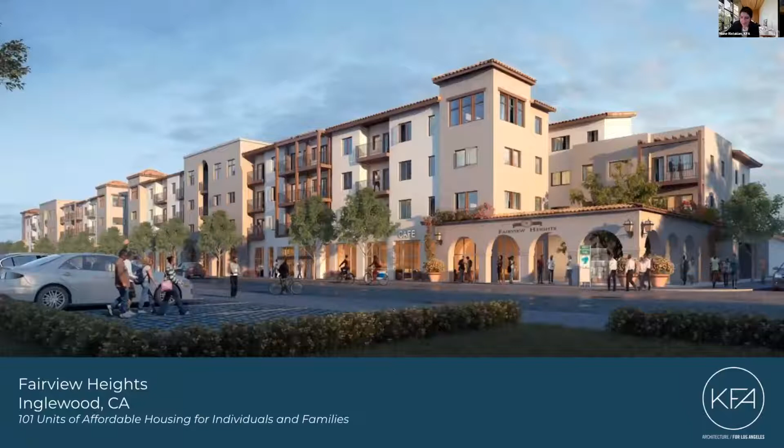The two projects we'll be talking about today have many similarities and have been partially overlapping in schedule. We're going to talk about these projects as they happen sequentially to illustrate how things are evolving in our office and hopefully how other projects can follow suit in the future. Hi, everyone. My name is Mane Ristakian, and I will be introducing the first project, Fairview Heights.

Located in Inglewood, California, Fairview Heights is a 101-unit, 100% affordable housing project with supportive services for low-income and formerly homeless individuals and families. We began work on Fairview Heights in 2018 and recently received certificate of occupancy in January of this year. Nearly all affordable housing projects that receive public funding are encouraged, if not required, to incorporate sustainability measures. For Fairview Heights, both the site and the building itself contributed to meeting these measures.

The site is located across the street from a new stop along the Crenshaw LAX Metro line, a significant transit project in Los Angeles. In collaboration with Metro, this project included an open plaza and public art piece for commuters in the area. For the building itself, we aimed to achieve LEED Gold, and we incorporated a highly efficient heating and cooling system and included all electric appliances in the units.

We also planned to maximize the available roof space for a future solar panel array, though during the design phase, we did not anticipate actually being able to install these panels. We broke ground on Fairview Heights in January of 2020. 8 months into construction, and seeing that there might be some budget available, the client decided to move forward with contracting and installing the solar panel system.

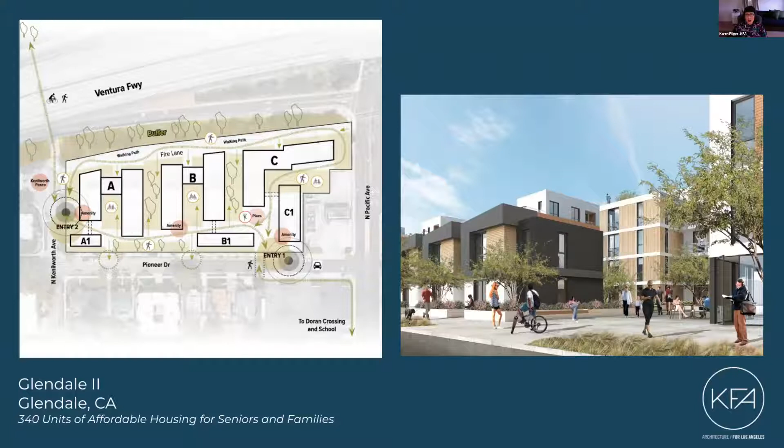With a strong focus on outdoor living, the project in total features approximately 38,000 square feet of common open space, as well as private open space for each unit. The project had ambitious sustainability goals from day one: high efficiency heating and cooling systems, energy efficient appliances, water-wise landscaping and irrigation, as well as water saving fixtures. The massing also allowed for the ability to naturally ventilate the corridors to further reduce heating and cooling loads.

An early space planning decision was to reserve the whole roof to maximize PV and target net zero energy for common areas. All mechanical condensers typically installed on the roof were designed to be located on each unit's balcony. Most notably, the project is all electric.

While it's not unusual to see electric ranges, especially in affordable housing, our projects still typically feature a gas boiler and other gas amenities. In order to plan for this, we located 3 dedicated plumbing rooms on the P1 level, again, saving roof space for solar. Additionally, additional equipment is planned to be wall mounted adjacent to these rooms to most efficiently utilize space.

If you are familiar with green building, you probably know that the golden rule of sustainable design is to determine the goals of your project as early as possible. We saw that with Glendale too, whose goal of going all electric was set from the start. However, sometimes it's okay to break that rule. One of the benefits that we had on these two projects is that in addition to having the same client, we also had the same mechanical, electrical, and plumbing engineers.

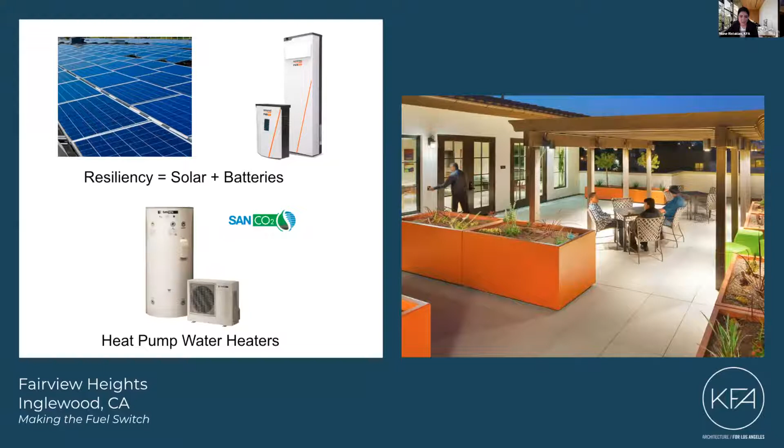Mid-rise multifamily housing is a challenging building type to push the envelope on sustainability. Also, with tight affordable housing budgets, increasing energy efficiency without driving up cost is key. It is great to have clients who understand and champion how planning and implementing sustainability features can fight climate change and even translate to savings operationally in the future.

With each successful project, we gain knowledge, and these case studies show how this knowledge can feed from one project to the next, or even help influence and modify projects that we thought were past that point of design. We look forward to seeing how much further we can push sustainability in the future, starting with learning from the other presenters here today. Thank you.

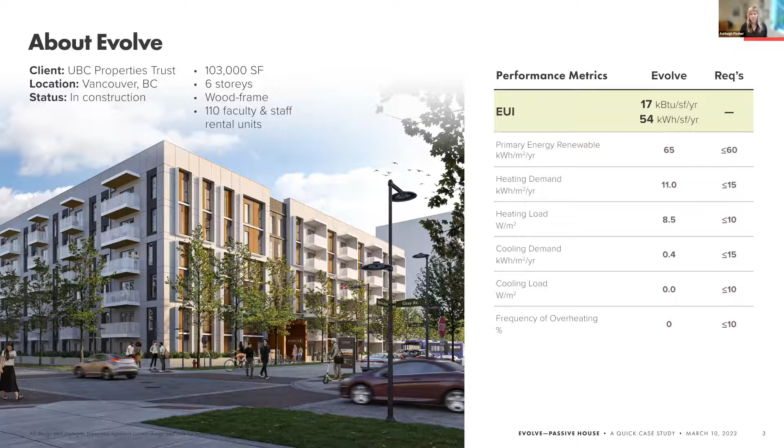electrified building. It's located at the University of British Columbia, and this is faculty and staff housing. It's about 110 units. This is a client we'd worked with very frequently in the past. They actually received a grant from Natural Resources Canada to do a high performance demonstration project. So naturally they came to us and said, ZGF, can you help us do this project? How do we do these high performing projects, which is not really typical for a lot of residential buildings in the Lower Mainland? So we jumped on board and really decided to help them show how they can be a demonstration. And what does that really mean?

In addition to typical passive house principles, which, like I said, is very energy and envelope based, you're looking at heavily insulated walls, building envelope continuity, which is recognizing where we have thermal bridges and reducing that. That's why you'll see a lot of really simple building forms in passive house design. Also, high efficiency mechanical, of course, so using things like heat pumps and HRVs in order to condition our spaces, and high performance passive house certified triple glazed windows.

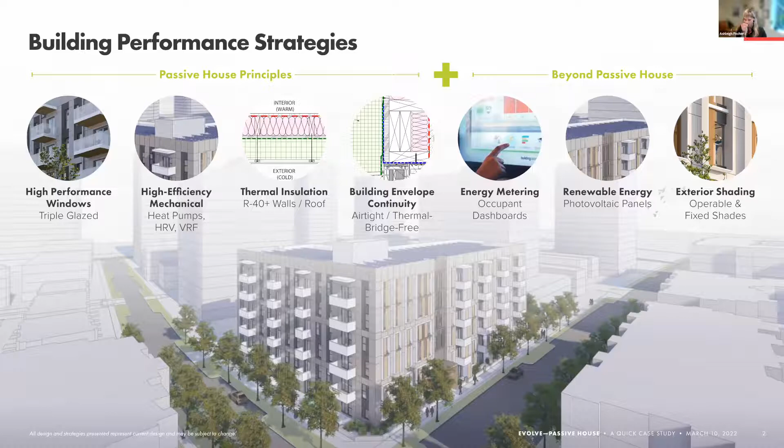Because this was a demonstration project, we were able to push those very stringent certification qualifications even further. This project will be analyzed in collaboration with the university after construction is complete to look at how it's actually performing: understanding how the systems are working, what energy we're actually using, and also looking at some of these more innovative items like renewable energy. PVs are not typical for the Lower Mainland, I will tell you that much. So we had to do some convincing, and we'll talk about that in a little bit, to get the client on board. Also looking at exterior shading. Exterior shading is pretty common. You'll see a lot of canopies and fins and things, but we actually got to do this pretty cool operable shading system that we'll get into.

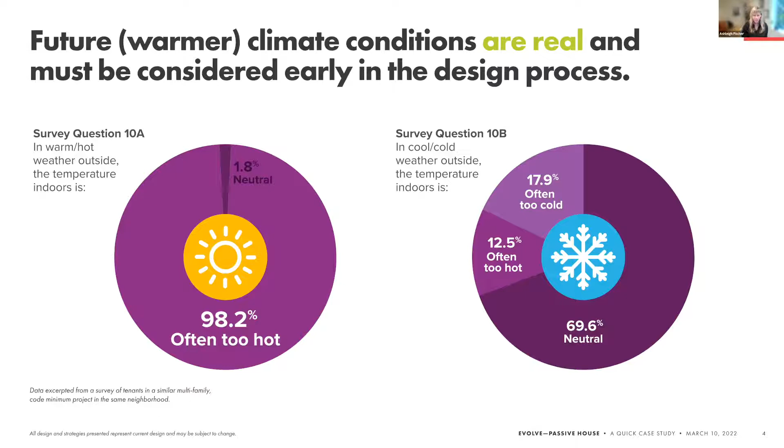A big reason for looking at some of these items pushing beyond the boundaries was climate change, recognizing that climate change is real and that the buildings currently in our building infrastructure are not living up to thermal comfort standards. The survey results you see on the screen here were taken from a building nearby, a couple blocks away, same tenant group of faculty and staff. We surveyed them this past summer during a heat wave we had, and they told us that 98% of the occupants were thermally dissatisfied and found their unit to be too hot. So we'd already been looking at that for this project, thankfully, and we'd come up with this two-pronged approach where we had a more passive strategy with the operable shades.

And we also had a fixed shade. So you see these big white boxes around. So we had kind of strategy A and strategy B. Each elevation is tuned for the solar radiation at that side. So on some of the elevations, you'll see these operable panels where there's the most impact from the sun, and that's on the east and the west. And then on the south, we just have fixed shading.

And the north, we actually ran some analysis and determined that we didn't need any shading and we just needed daylight. So that was really a full team effort in coordinating with our mechanical and our energy modelers to determine what we needed for this project and not just putting shading on the building for the sake of having shading.

We also implemented partial cooling, which is not very typical for the Lower Mainland as well, especially for residential projects. A lot of times it's seen as a cost add, like a luxury item. It's not really needed because in the past in Vancouver, you could really just open your window. It's not like LA where it's hot most of the year. It's actually pretty temperate here, but the past several years, we've obviously seen a big change in that.

And so we ran some analysis, again, encouraged the team to implement partial cooling, which is integrating a cooling coil into the ventilation system. So it doesn't use up as much energy as a full typical HVAC air conditioning system.

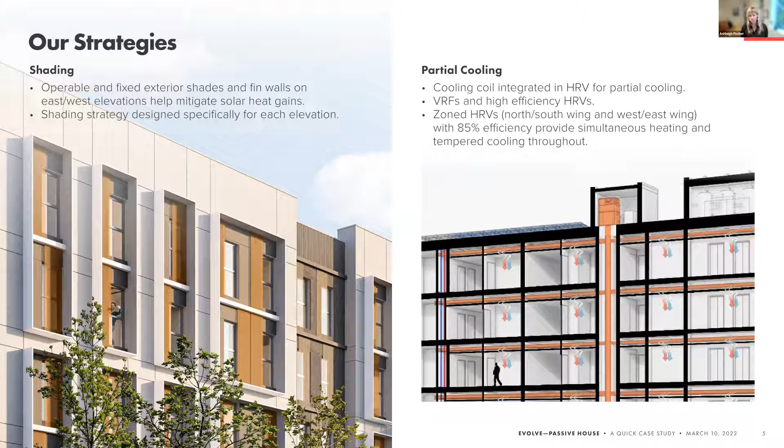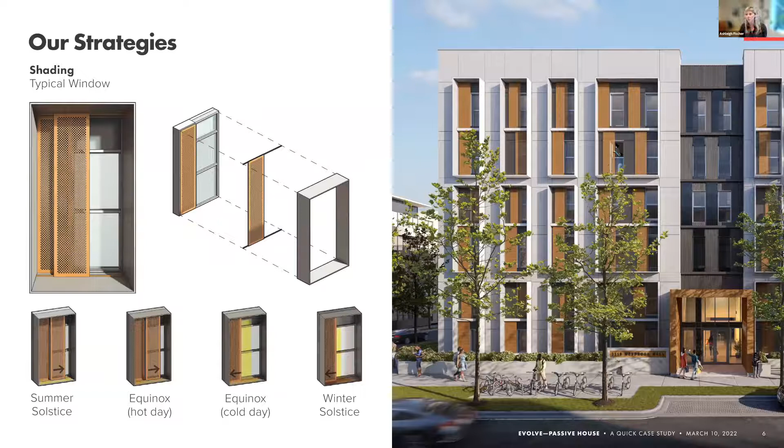Just a close up here on the shades. And this was our very initial concept diagram that we drew. And you can see how that really carried through to the actual design and how it looks in construction. The concept was to have perforated shades that allowed visibility through to the outside, but also provided shading. So when they're closed, you can kind of see through them, but you can also fully open the shade. And you can see there's somebody up in this rendering who's using their shade right now.

These were another really full team effort. So this wasn't just something we drew on a page and said, build it. We actually worked with the aluminum fabricator to understand how these things would be fabricated and brought together and put on site. We also worked with the contractor to get this tracking system. We actually imported these from Europe because these types of shading systems are really popular there.

And then we worked with the envelope consultant to make sure we weren't pushing our thermal bridging too far with all of these connections. And then we worked with structural to make sure that these could handle any wind loading that they might be subject to.

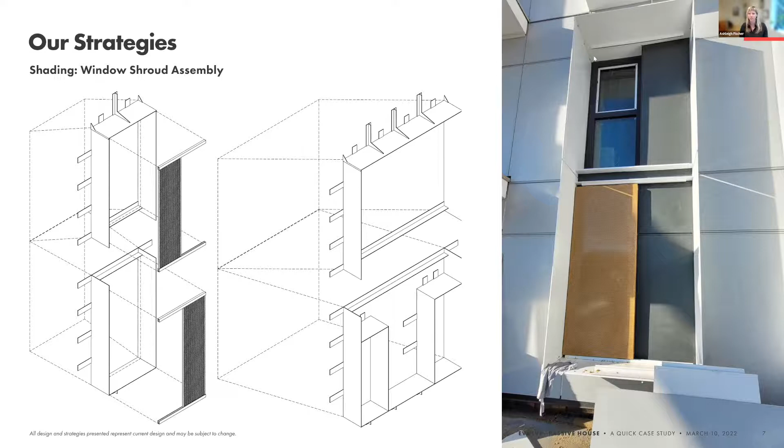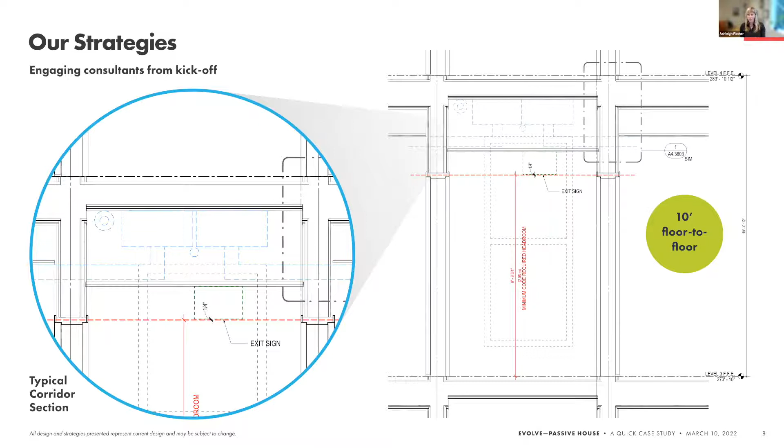One more note on our cooling system. This was a cool exercise we did as a team. We had drawn this section with no systems in and actually brought it to a team meeting and really worked together to figure out how to fit this thing into this tiny space in the corridor and still achieve a 10-foot floor to floor. So we were able to reduce the size of the mechanical system through our shading system, fit it into this space, and also reduce construction costs by reducing the overall height of the building.

PV, as I mentioned, is also implemented on this project. And the way we achieved that and talked to the team about doing this non-conventional thing was looking at that future cooling load. So you see that future cooling load in green. And that was really how we understood what the impact of this building would be for the future. So while maybe the PVs weren't generating so much energy now, they well overtook the current cooling load, which you see in blue. In the future, they're going to be actually impactful at bringing that energy load down.

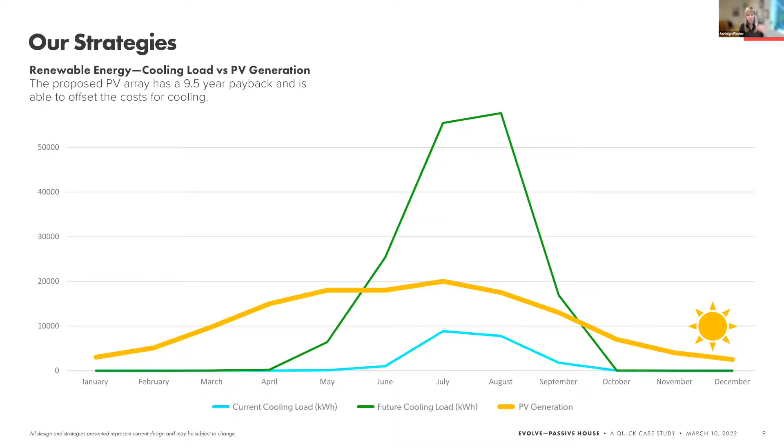We also worked with a local manufacturer to take this new system, which is these pedestals you see. It's a newer way to mount PVs. Because it's a passive house, you can't have a bunch of penetrations through your membrane. So these are a way to weld the system to the roof membrane itself. Because it was so new, it wasn't through all its seismic certifications yet.

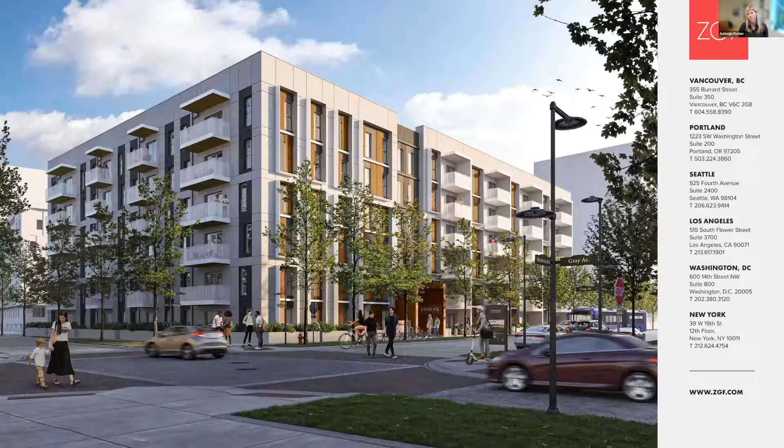So we actually got to go to the lab at UBC and watch them test this product. It passed, none of our panels broke. And so it's implemented here, and we're actually implementing it on a few of our other projects as well. So it's these types of things that we really got to dive into, do a little research on our own, and we're really hoping to push the industry in a positive way and learn from this project ourselves as well.

Thank you. I appreciate that. Passive projects are not entirely passive; they're active also, and it's always good to see that.

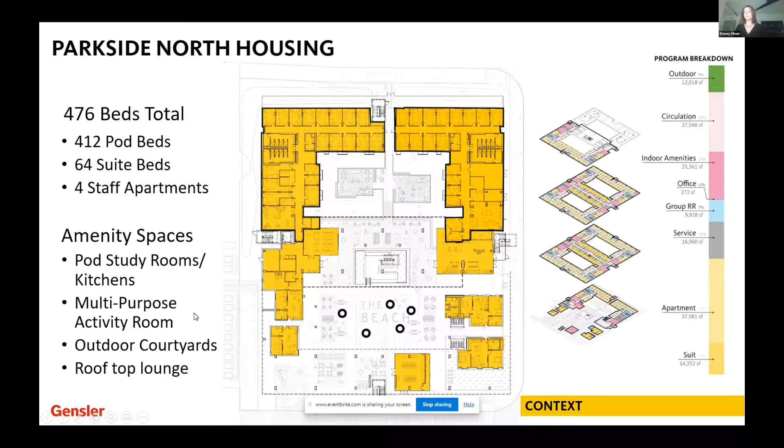We know LEED Platinum is more about what you can't do than what you can do. Everything is on the table. We documented 88 points out of the possible 110. And of course, we know the minimum requirement for Platinum is 80. We'll be submitting at the end of this week. The Living Building Challenge perspective: so across all of the imperatives, all 7 petals, we are submitting 3 for certification on the housing project. The admin project is pursuing all 7.

From the place petal in this project, we had a very strong focus recognizing and protecting the ecology. That includes designing for human scale and supporting enhanced urban agricultural programming. On the energy side, again, that means designing for more energy than we are using. So this data is validated by tracking and submitting it after 1 year post-occupancy so that we can be awarded pending a generation of 105% of the demand, which we're on track to do.

On the beauty and education petal, this is about enhancing biodiversity on the campus. We also used a series of biomimicry strategies and created a robust education program to help celebrate sustainability and resilience for years to come. On the net zero energy side, it really comes down to energy demand reduction first. So that starts with strategic orientation and massing.

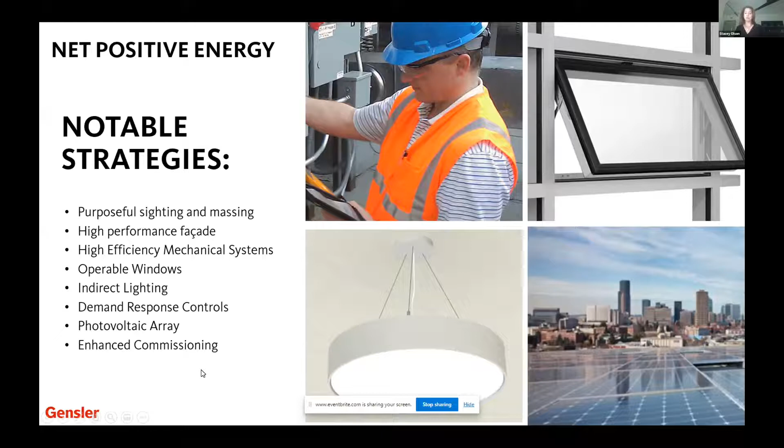We have a very temperate climate in Long Beach, and that reduced the load. We also used an indirect lighting design strategy and a robust photovoltaic array.

The water strategies, where we really see these 2 projects intersect the most, we negotiated with the CSU chancellor to extend the adjacent municipal purple pipe that was on the other side of housing 1/2 mile down the central corridor and created 7 additional T stub outs along the path.

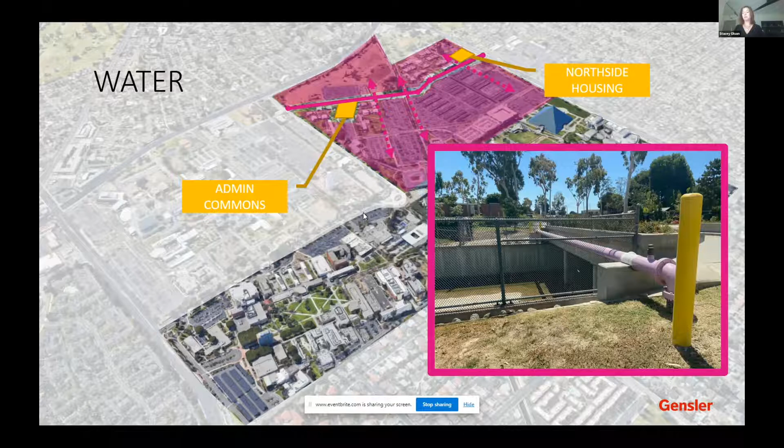This essentially future-proofs their entire South Campus, providing non-potable water, saving about 5 million gallons of water annually. To visualize that, that's about 2 Olympic-sized swimming pools of clean, potable drinking water saved every single year.

Did I sneak in under 5 minutes? That's the end of my story. You did it, Stacy. Thank you. Thank you so much. And I love the integration into the campus. It's really a beautiful, beautiful project. It's so interesting. I feel like those of us in this world are not used to fast pitching all the time. We run an accelerator for startups, and that's all they do is fast pitch all the time.

Next up, we have project 5, which is from Mazzetti, the Boulder Commons. Can you guys see my screen? Yep, we can see it. Perfect. All right, so I thank you for allowing me to come and present.

So I'm presenting on a project in Boulder. I am a part of Mazzetti. I'm a mechanical engineer, and I have the privilege of being located in our Denver office. Mazzetti is known for healthcare, but we in the Denver office do a little bit more diversity on projects. So we do quite a few multifamily, especially up in the Boulder area where it can be very stringent on energy code requirements.

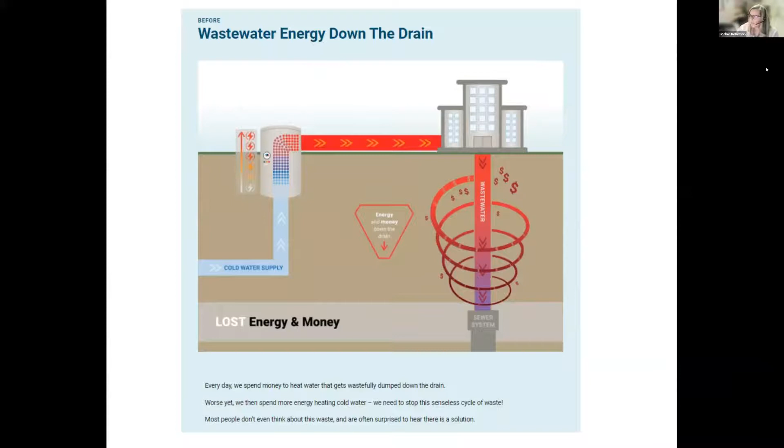So in a basic building, especially multifamily, you're taking wastewater and just connecting it into the utility system. And so you're really throwing money down the drain. And there's 2 companies at the moment, I believe. We were fortunate enough to work with SHARC, and they have a system where you can take this wastewater, and instead of throwing it down the drain, you connect it in and it preheats your hot water system.

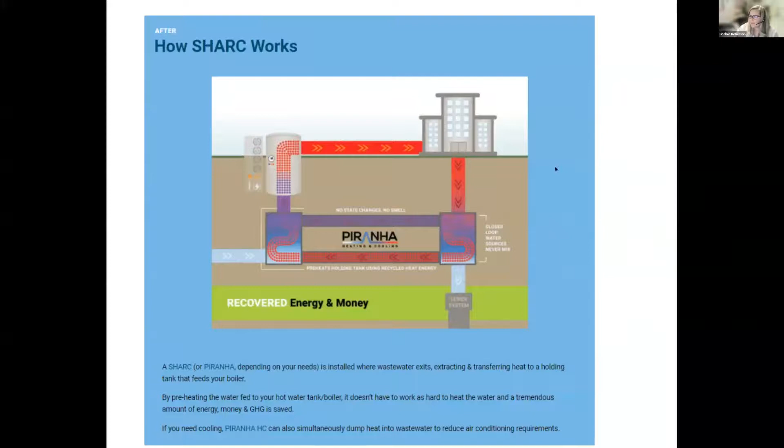And so we took that opportunity and connected it to our building, and it makes up 90% of our required load, which is pretty incredible for a multifamily building when everyone wants to shower at one time. So with this installed, and it is not a pretty picture, but I wanted to at least show you, it's big. It's not a pretty system, but it was located in the garage below. It was the way this building was designed. And we were able to make up 90% and save 30% of our energy with this system. So I think that's it.

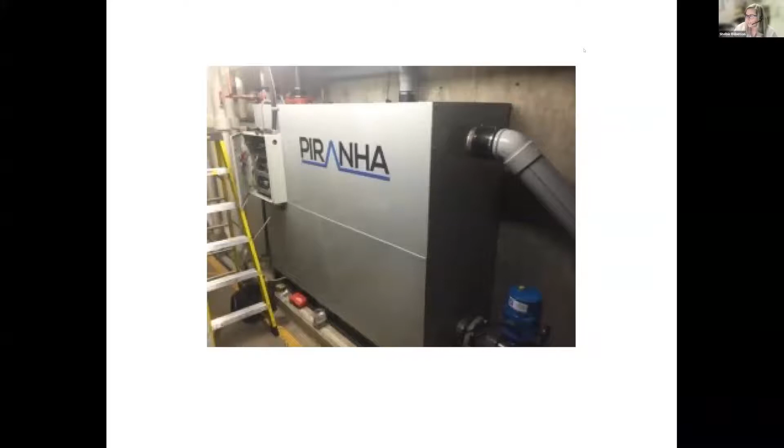Thank you, Shelby. That was great. That's great. It's nice to hear about projects from other parts of the country. We don't get to hear about those as often as we might like out here in LA. All right, so project 6 to close us out is from HMC. So our team at HMC, over to you. Great, thank you. Everybody see my screen? Yes, loading now. Yep.

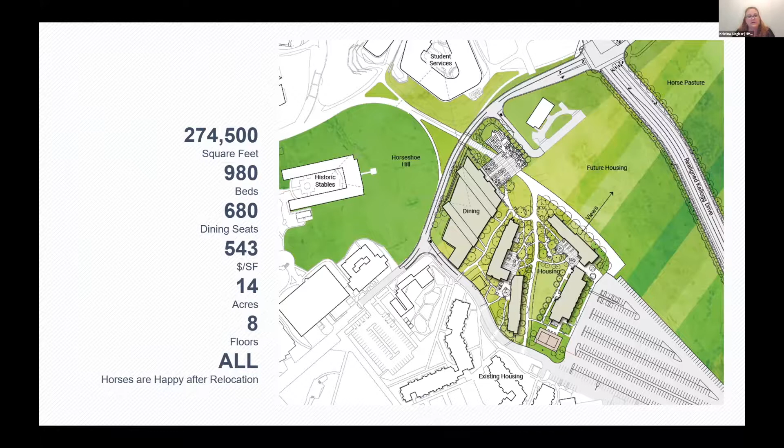Okay, fabulous. So yes, hi, I'm Christina Singizer. I'm the managing principal of the Los Angeles office of HMC Architects, and I was also the principal in charge on this project, the Cal Poly Pomona Student Housing and Dining Complex. This project finished up in January of 2020, and it's 275,000 square feet, 980 beds on 14 acres, right at the front door of the Cal Poly Pomona campus. And it was 8 stories tall.

So when we first started this project, the president really challenged the residential life folks and us to condense this project into the smallest footprint we can and really create taller buildings. And the Res Life director was very concerned about this because they don't have any tall buildings on campus for student housing. They're in 2 and 3 stories. And they were worried about the connectivity for the students, if they were going to feel like they were a part of the campus. And so some of the things that we really looked at for this was how do we drive daylighting and views into the student housing projects.

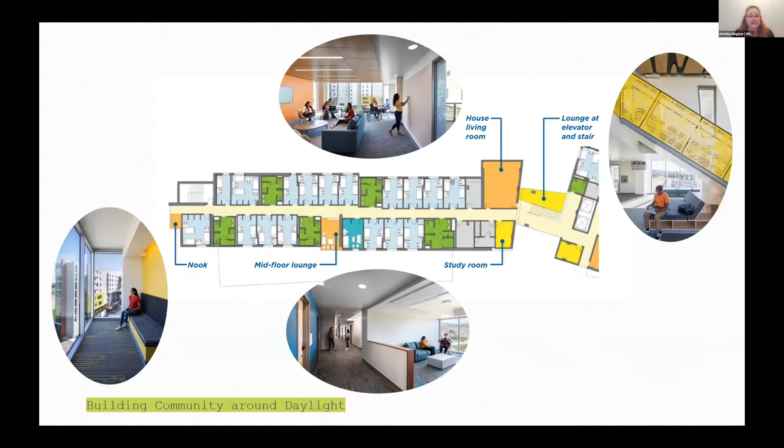So the other thing was the connection to the outdoors. And we also know that having a strong connection to nature is very important for cognitive functions, productivity, lowering sick building syndrome. And we know that nature facilitates socialization. So it was really important that all of the spaces in the building had that connection to nature, especially when you're up on the 7th and 8th floor, that you still had kind of that touch point with terra firma. And we know that nature reduces stress and anxiety. And that is a huge issue in our colleges and universities today. So really having that connection to nature was important.

So obviously on the first floor, we had great opportunities in Southern California to open up to the outside, large courtyard space in between the 2 tower buildings where laundry rooms and kitchens and all the kind of classroom public spaces, living learning spaces were able to exit out into the courtyard space and really create that kind of community and connection to nature all throughout it.